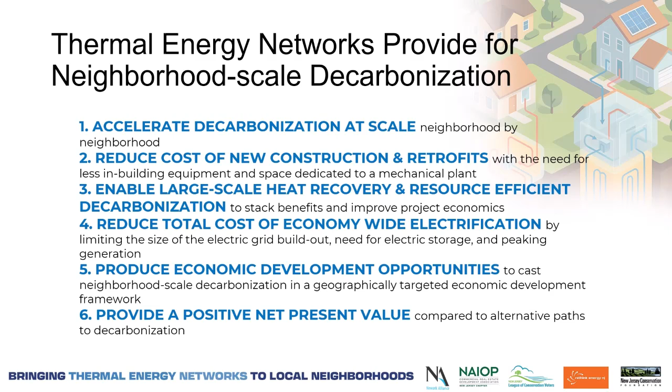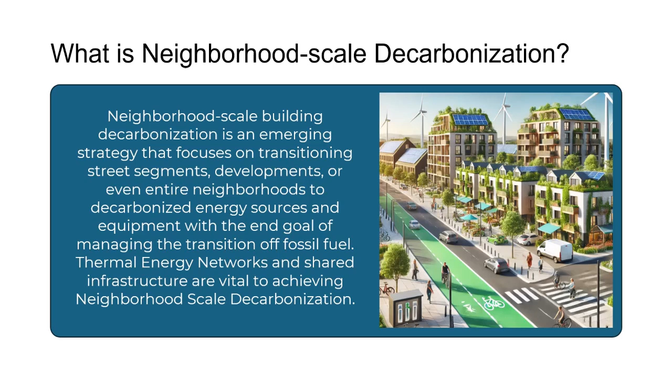This webinar will focus on neighborhood-scale decarbonization using case studies directly from professionals working on current projects. These projects are transitioning street segments, mixed-use developments, or entire neighborhoods off of a dependence on fossil fuels using thermal energy networks as a decarbonized energy source, along with highly efficient electric appliances. Thermal energy networks connect otherwise separate parts of a city in order to utilize waste heat or ambient temperatures, such as from a data center, a local body of water, wastewater systems, or from geothermal bores.

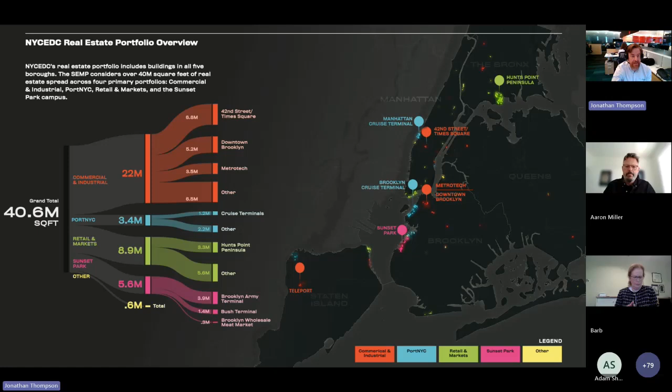There are several campus-like properties within our portfolio. You can see from this map we have several properties that are very much waterfront and also clusters of properties which lend well to thermal energy networks and shared loads. We have three projects that we're currently developing concepts for right now for thermal energy networks: one in Teleport in Staten Island, another in Hunts Point in the Bronx, and another in Sunset Park in Brooklyn.

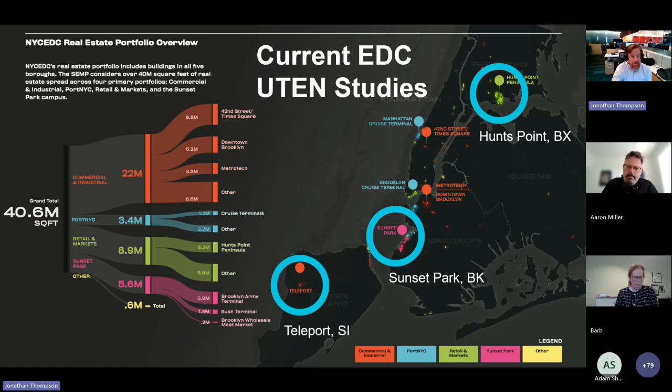I'm going to focus on Sunset Park today because we have moved on to what is phase 2 for our study of the thermal energy network in Sunset Park. We had actually completed phase 1 in 2023, and that included the Brooklyn Army Terminal, which is somewhat of our flagship property. It's a little under 4 million square feet of manufacturing and industrial space, which is also right next to the Brooklyn Wholesale Meat Market, a refrigerated warehouse offering year-round waste heat potential.

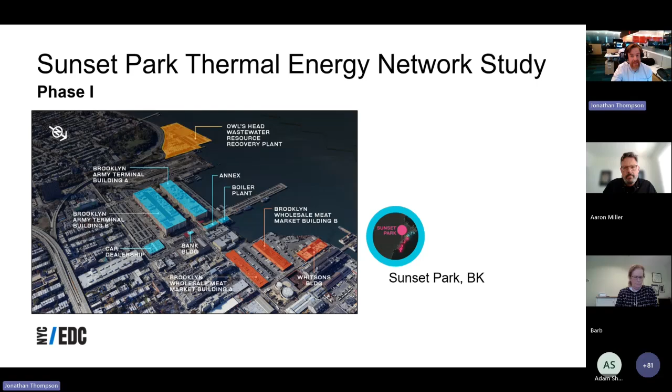The study also leaned on previous work done by the Department of Environmental Protection, where they evaluated all 14 of the city's wastewater plants and the potential waste heat from the effluent outfall of these plants and what that could mean in terms of capturing that waste heat resource. Because that information was already available and it was actually quite nearby, just across what is also city property, the 65th Street Rail Yard from Brooklyn Army Terminal, we used that as an asset in developing our initial study.

The goal was to leapfrog technologies in terms of heating and cooling, whereas Brooklyn Army Terminal and the wholesale meat market were currently operating on unitary systems, DX cooling, as well as gas-fired hot water heating throughout. These systems were not centrally controlled. There was also often simultaneous heating and cooling. It was largely inefficient and also did not fit in line with the city's overall strategy towards decarbonization and electrification.

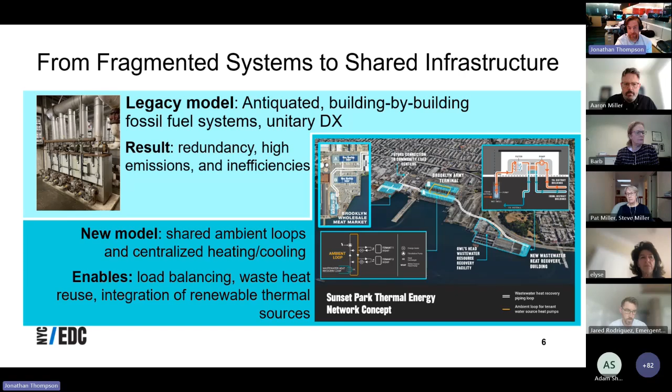This concept that we developed in phase one included an ambient loop between buildings A and B of Brooklyn Army Terminal, connection through from a primary loop at the effluent outfall of the Owl's Head wastewater treatment plant to Brooklyn Army Terminal, as well as the wholesale meat market, allowing us to share waste heat to balance those loads and integrate that waste thermal resource, moving towards a modern system that was efficient, decarbonized, and had as low an impact on our utilities and electrical load as possible.

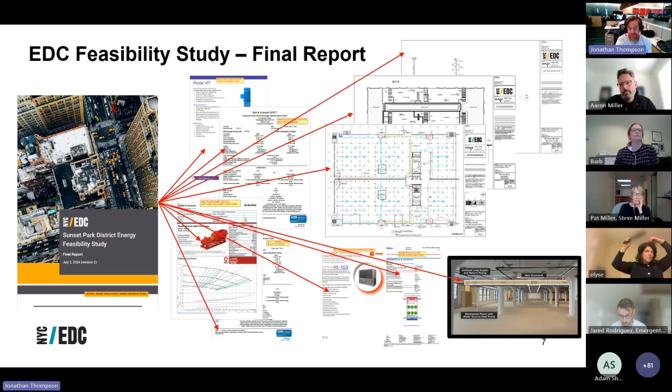The study was technically very rigorous, very heavy in terms of specs, components, the actual details of the system. But what it didn't provide in good enough detail to move this forward effectively was really a strategy of how we actually deliver this project, how anyone makes effective decisions from a strategic standpoint.

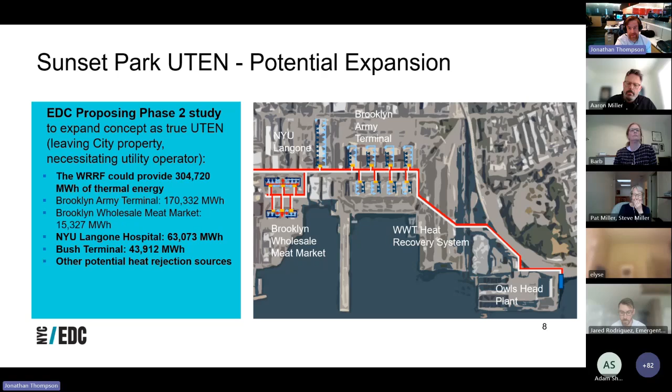Another thing we found is that with the total annual loads of the Brooklyn Army Terminal and the wholesale meat market, we were only using a little over half of the total annual capacity of waste heat from that Owls Head plant. So for the large capital expenditure of that utility infrastructure, we were not utilizing that waste heat well. There was an obvious need to expand this project from the phase one scope towards something that broadened both the physical boundaries of it, but also the informational boundaries of what it is that we were solving for.

So we moved towards a phase two study that we had actually kicked off just a few weeks ago, and this expanded the boundary of both the potential off-takers and different adopters of the system, leveraging our property up at Bush Terminal, as well as private off-takers, including NYU Langone, that was just across the street from the wholesale meat market, but also including other thermal sources such as river water exchange and geo-exchange at the rail yards.

This broadening of the physical scale allows us to introduce different thermal sources, to evaluate different loads and better optimize this system and provide potentially overall benefit in terms of the financial value of this.

But what we needed to solve for in order to really make this commercially deliverable was, what is the value of the system to the city? What are the financing pathways? How do we pay for this system? What's the governance structure, considering all of these different entities that would be involved, including DEP, EDC, the mayor's office, the PSC, utilities, private off-takers, and then what is the roadmap, the implementation roadmap?

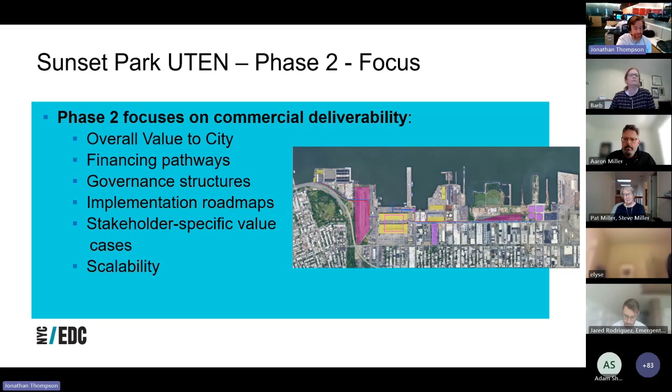The technologies that would be included, and then the final group would be the adopters. Not that they are the last group, they are just as important as any other group within this project. Without the off-takers, there is no thermal energy network. So bringing the value of this to them, having their buy-in from the beginning, is immensely important.

But before we actually go to them within this project, it's really having an understanding of the needs and the kind of decision pathways of the other levels that we need to have understood before we go to them and say, this is a real project and this is how it's going to get done, and this is the value to you.

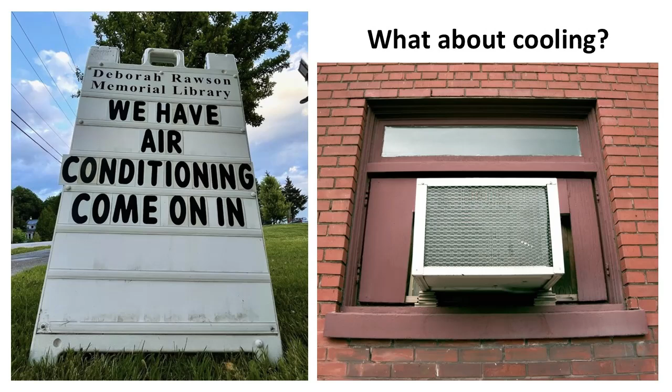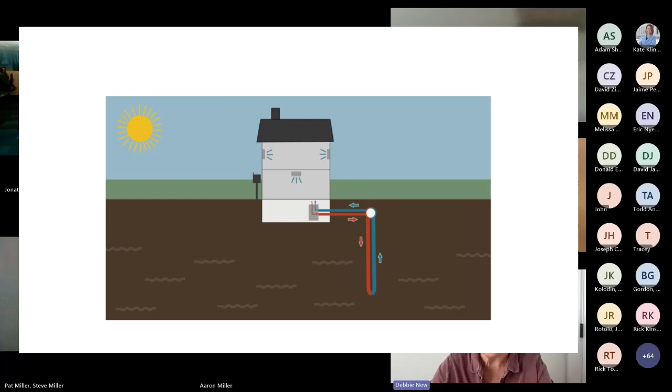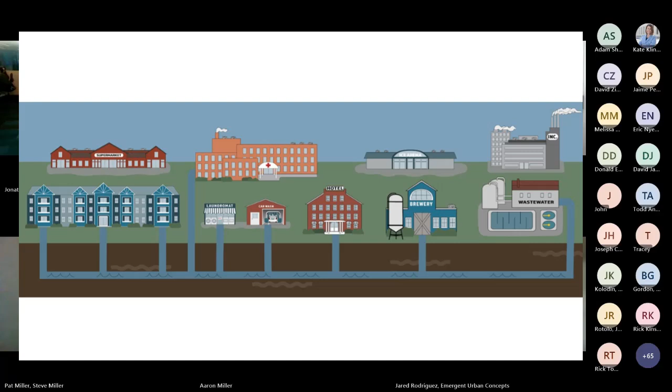We also really try to help people understand the opportunity with wastewater, and Aaron is going to talk more about that in a little bit. But we can access heat from wastewater at the building, at sewer lines, and at the gold mine that's a wastewater treatment plant. We also talk about waste heat from buildings, especially from large refrigeration systems, from any kind of cooling that has to happen inside, and reject heat outside from supermarkets, ice arenas, and large buildings. So we show what it can look like in a town where under the town green, there can be a geothermal bore field that you don't even see once it's been drilled and seeded and covered over. We show a grocery store that's contributing its waste heat to the network, and a lot of different kinds of buildings where their wastewater can contribute heat into the network. So we help people understand that TENS use heat that already exists across a community, in many cases has already been paid for and would otherwise be discarded.

We also talk about how it can be shared efficiently, and this is really key to the benefits of TENs.

We explain that air source heat pumps have to work a lot harder at very cold temperatures and hot temperatures, and use more electricity. We make sure people understand that air source heat pumps are important to our electrification goals and they're complementary to other technologies. They have a really important role in what we're trying to accomplish.

But with ground source heat pumps, they use moderate temperatures. In many places, it's about 50 degrees underground that we can access and use. And if we're using waste heat, those temperatures can be even closer to what we want to stay comfortable inside.

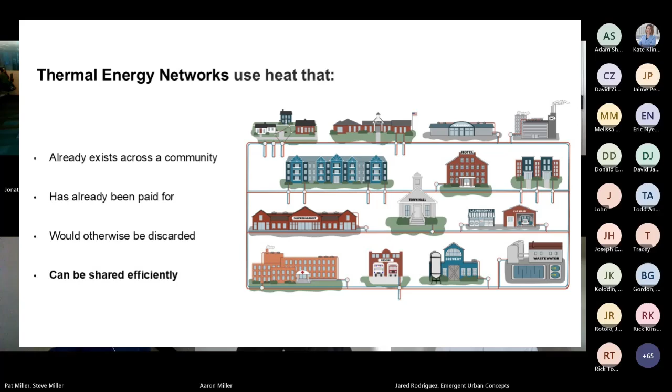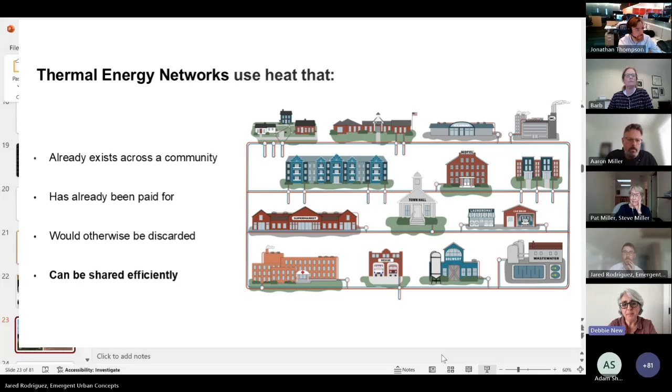So that high efficiency translates into energy savings, from which flow a lot of cost savings, and that all translates into many community benefits. Some of the top ones that are particularly important to many of the communities we're working with are economic development, downtown revitalization, and affordable housing. When we can hang on to energy dollars and invest them locally, we can do a lot more in our communities and for our communities.

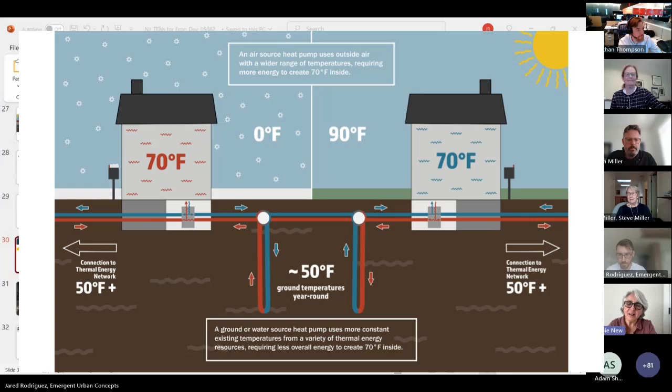Thank you. So we explained it's not just about communities benefiting from TENs, it's also about them having agency. Thermal energy networks as shared infrastructure, much like water and wastewater systems, mean that thermal energy is actionable locally in a way that the electric grid just isn't. And that's empowering for people. They can do something and they can direct it to get the most out of it for their community.

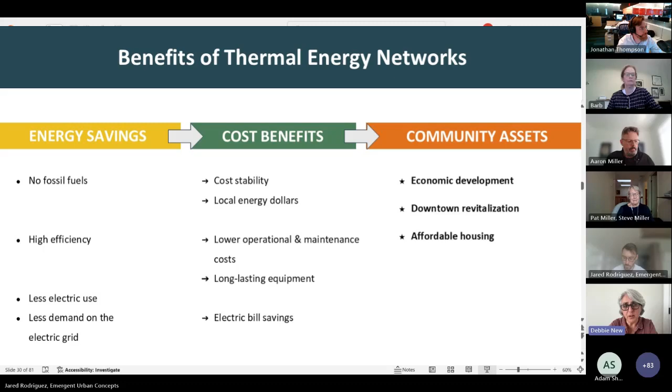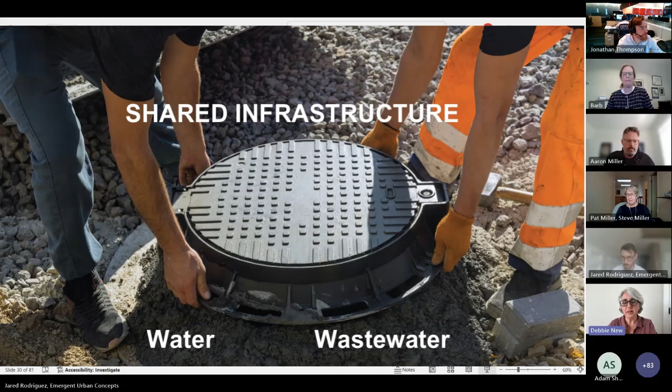So we've created a toolkit to help people understand how they can develop TENs where they make sense locally. It's divided into about 4 sections. The first is called Start Here, which is about local conditions that could be good opportunities for a TEN. Identify Opportunities is a lot about site selection, but also whether or not you're ready to launch a TEN, and how to lay the groundwork for one. Understanding Ownership looks at 3 basic business models: municipal, cooperative, and third party, and related financing opportunities. And Develop Your Project is something we like to call what to expect when you're expecting a thermal energy network.

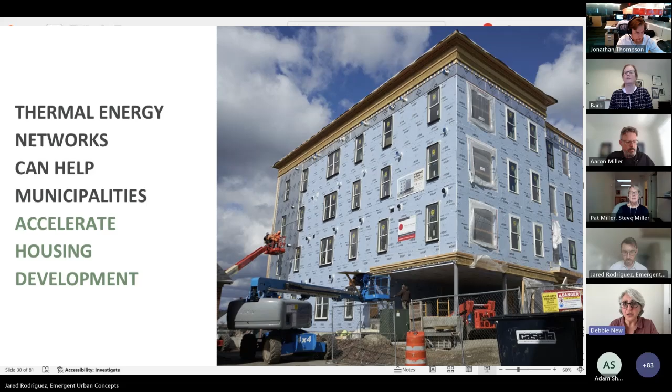Specifically, the entire trench can be eligible for tax incentives when thermal pipes can be incorporated into trenches already planned for water and sewer. Lower overall costs can incentivize developers when HVAC equipment can be financed as part of the network. Developers also don't have to be responsible for maintenance and operations when TENs are locally owned and managed.

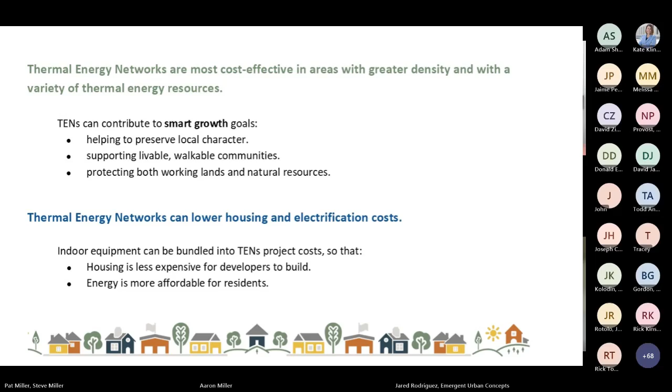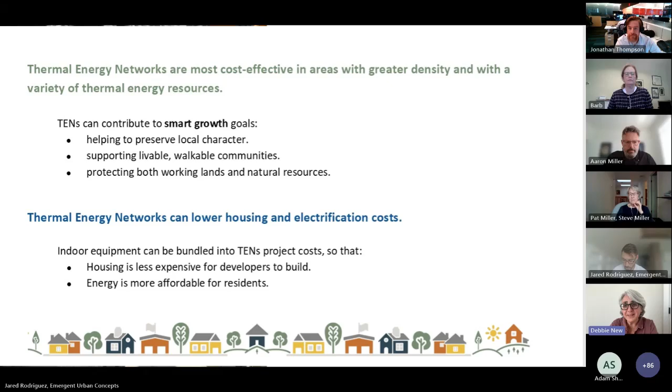As we know, water and sewer systems are public infrastructure that have many benefits. Municipalities install these systems and provide these services already. They have access to lower cost capital, which covers upfront costs, and customers paying regular bills cover that debt service and fund operation and maintenance. We understand how to do that.

So thermal energy networks are similar shared infrastructure. In fact, the economics are possibly better, as the water does not need to be treated as intensively as for potable water and wastewater.

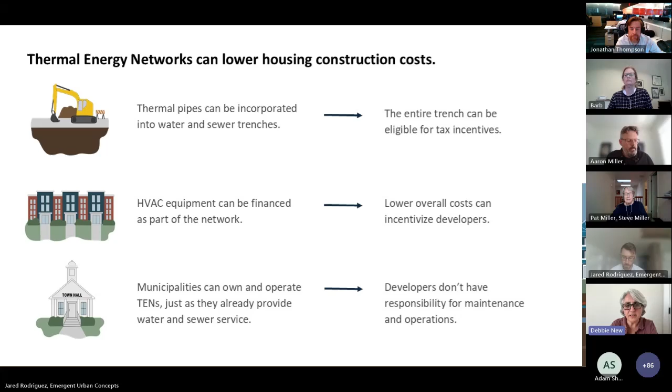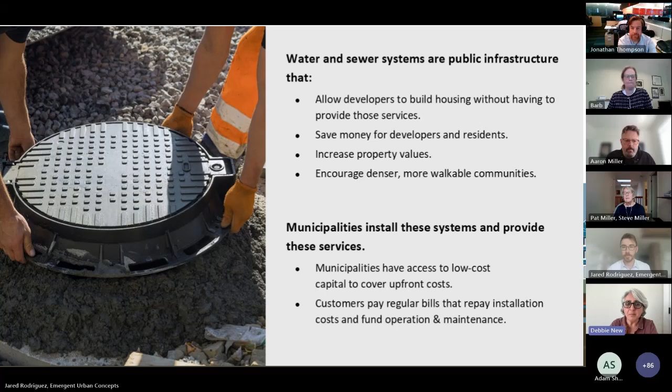We can do more with thermal energy networks when we coordinate and plan. Working TENs into planning means we're more likely to have the time and local buy-in needed to include them in projects, and we can start small and start now. We can have some TENs in place, making it easier to phase in more buildings and add thermal energy networks as we build and retrofit our housing stock over time.

So not only is heat a precious resource, but we also have the heat we need and opportunities to harness it, particularly for housing and related development. I understand that in New Jersey, you're really good at transit-oriented development, in fact among the best states in the country, which is an important opportunity to use TENs as a tool to do more of what's already familiar and in large part you already know how to do.

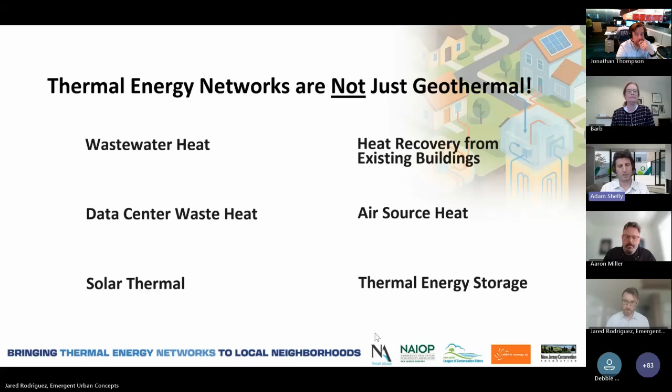I'll mention 30 Rock here and SNL - a lot of shows are recorded in 30 Rock. And all of that heat is now going to be pumped into adjacent buildings for domestic hot water and heating hot water. So it's a really powerful project that has the ability to save not only GHG, but a lot of money for the different customers, and also be a money producer for that thermal resource for 30 Rock. That's a huge distinction because the cash flow is not a one-way street. Everybody can get involved as a buyer or as a seller, depending on the criteria for that particular system.

So what do we do on the project? We're taking on everything from stakeholder management, phasing through the construction of the crowded streets. We're crossing 6th Avenue - there's a lot of complication to it. We're hoping that gets approved and built by the state. The design is going in shortly, but it's a really great opportunity.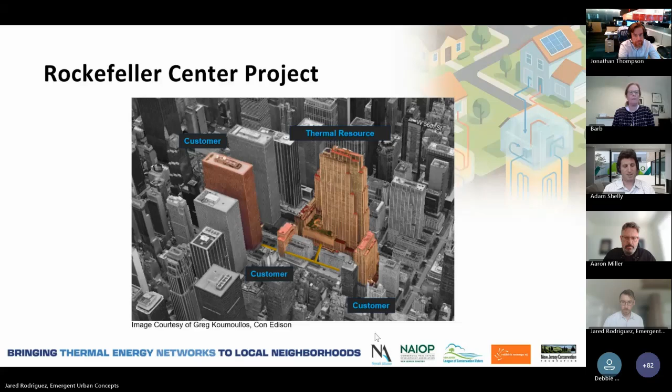A couple of key takeaways on this. Working with the regulated utility obviously adds complexity, but it also adds structure. The structure is helpful - it helps create governance models, cost allocation rules, to define different requirements and characteristics that you'll have during design and construction, but also during operation and expansion, because there's a lot of different factors. The stage gate process is really helpful in establishing this, moving from feasibility to concept to design to implementation.

It's essential. So it's tempting to rush to a preferred technology, but you have to resist that urge. You really have to look around and say, where are my assets and what sort of heat are they giving off and taking? I'm originally from Philadelphia, so I always like to tell people you got to trust the process - it's very relevant today with the NBA draft. So you have to trust that process. It goes a little bit slower, but it's important not to cut those steps early on during design and development.

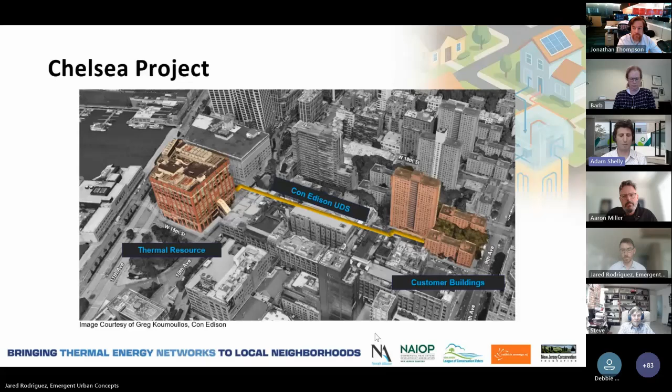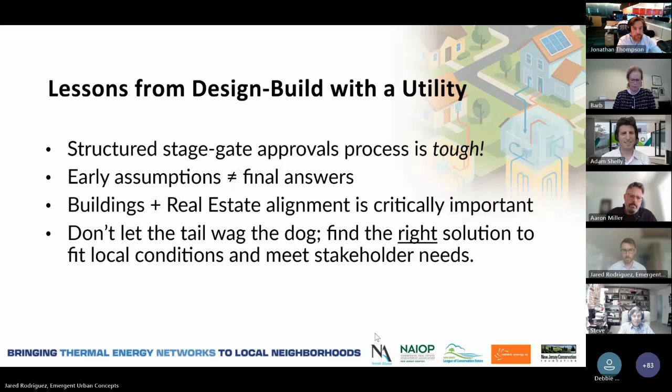Next slide. I'll skip that one. Let's go to the next one. Let's do one more, I think I lost track. Oh, we're burning through this.

This is great. How does this apply to New Jersey, everyone on this call? We see a really strong opportunity in that MUSH market - municipalities, universities, schools, hospitals - because they tend to own multiple buildings with various loads, and they tend to have capital planning cycles that align with energy investments. So we think that's a really strong market for New Jersey. They're also mission driven in a way that supports long-term decarbonization goals. So a well-structured thermal network across a town campus, some of those smaller towns, or something with a school or a hospital, I think are really good, easy targets to focus on.

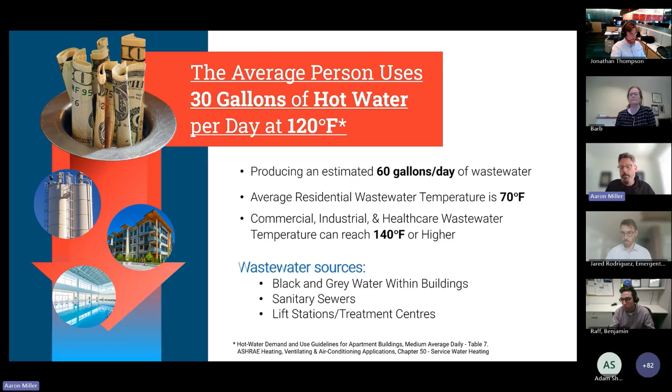Again, heating, cooling, and hot water production, just like you would with a standard heat pump. So we have two boxes essentially, with variations on a theme within each. The key is really scalability. This Piranha is a small heat pump.

Our smallest unit is in a 37 unit apartment building in Boulder, Colorado. We're providing 100% of the domestic hot water, simply capturing the wastewater before it leaves the building. The rule of thumb is if you give us 100% of the wastewater before it leaves an apartment building, we can provide you with 91% of that domestic hot water load. It's almost a completely circular economy.

It's very similar to solar thermal in that regard. As you can see here, in the middle, in white, all these market sectors make a lot of hot water waste and need a lot of heating, cooling, and hot water to match. So it's about finding the right mix of diverse assets. If you have a neighborhood with a lift station, a commercial laundry, or a microbrewery, you can use that as an energy source, a hub for a thermal microgrid.

As we've been talking about, you'll hear us talking about repeatability and scalability. We understand that thermal energy networks are fantastic, but they take time to develop. So it's aim small, miss small. Pick off what you can, and then continue to add to that mix.

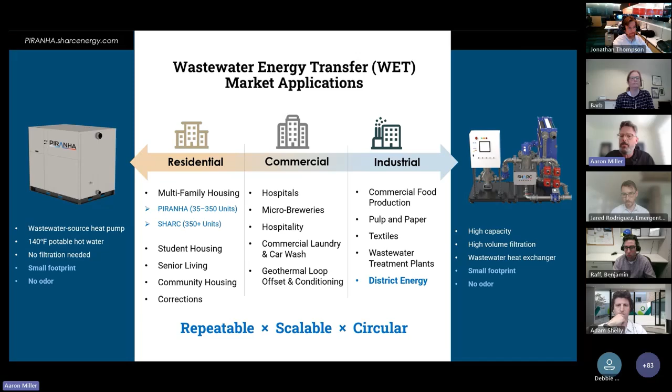I want to walk you through some success stories. These three are focused in New York, in various stages of development.

Amalgamated housing is low to moderate income housing up in the Bronx, and we're in the process of designing a system to capture all the wastewater before it leaves the building, to provide roughly about 85% of the domestic hot water for those buildings. It's a campus, so this is phase one. Phase two, phase three will add more buildings onto it, and will also incorporate geothermal. So again, it will scale up in a way that makes sense from a financial and civil standpoint.

Whitney Young Manor is a complete overhaul of LMI housing. This is a fascinating project because it takes a village - there is no one silver bullet. We're going to be part of air source heat pumps and other new facade and new hydronics throughout the entire building. What's really neat is they're actually excavating the ground because the sanitary pipe that takes all the sanitary from these two buildings out to city sewer runs four feet below the foundation. So they're going to excavate out the foundation to create a wet well to act as that thermal battery.

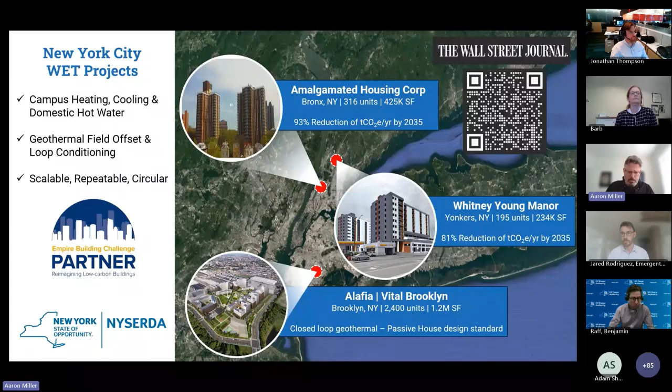Really fascinating project. The Alafia project, which is up and running right now and we're accepting tours, is again a multi-phase project. The first phases are these two buildings, Alafia C1, C2, which is two towers with a common sanitary output, and then a smaller building across the walkway, which has two Piranhas in it. We are using a mix of geothermal and wastewater energy transfer to maximize the thermal capacity and efficiency of the heat pumps in these buildings.

One of the great things about... I'm really sorry about these slides advancing.

It was interesting when we looked at the original model for C1, C2, these two big towers. The designer, Salis O'Brien, was saying, hey, we'll put the SHARC in to do heat recovery to make hot water and heating for the building. It turns out actually by putting the SHARC in to pick up the peak cooling loads, because it's passive house design, very cooling dominant, we were able to let the geo designer right-size the geo field from 125 boreholes down to 93. That's a massive first cost savings, over $500,000 on first cost savings.

Now moving forward, we'll use the sanitary to temper the loop, the ground loop, to keep it in that ideal 68 to 82 degree temperature range throughout the year to maximize the efficiency and capacity of the heat pumps connected to the loop. So you'll get the OpEx savings over the next 15, 20, 25 years. It's a win-win all around.

The other thing I wanted to point out as I move through these slides is, as flexible as our technology is with regard to connecting it to the mechanical and plumbing systems of said buildings, there's also flexibility in how you finance these projects.

This is a privately owned, heavily incentivized project. Private owner, private developer, and they're going to be owner and operated, but they're leaning heavily on Con Ed clean heat incentives. I know our technology qualifies for the clean heat and heat pump incentives in New Jersey, as well as the Inflation Reduction Act investment tax credit.

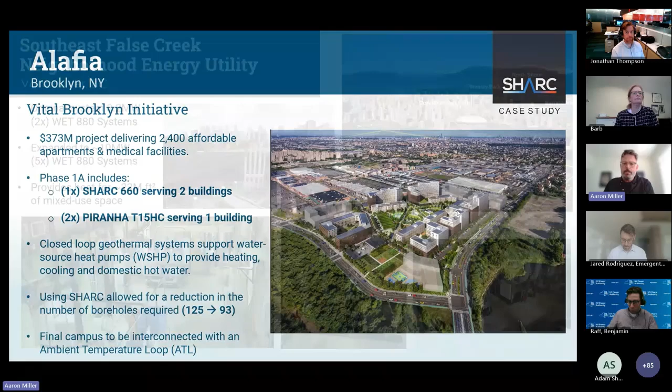So again, this is a rendering of the whole campus. They're eventually just going to build out these pods one at a time and then interconnect the entire campus with an ambient loop. Another really successful district project out in Vancouver.

I want to move through these pretty quickly because we're short on time. This is a standalone utility. It only takes money from the off-takers connected to the loop, so they don't take any incentives, no outside monies.

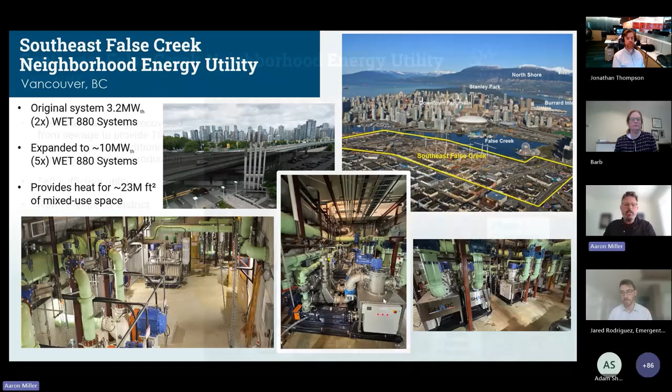Again, it started out originally as two SHARC 880s. We've now expanded it to five, and phase 3 is going to include this additional phase here in the city. So we're going to go from 3.2 megawatts to 10, to roughly 30 megawatts. Right now we're providing 180 degree hot water for 23 million square feet of mixed use space. They're going to 10x that in the next 5-6 years.

So again, scalable, and all we're using is the wastewater that's passing by in the municipal sewer line. It's an untapped resource that we're leveraging.

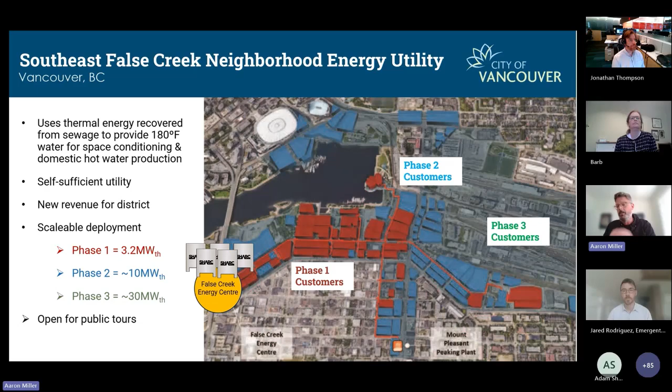Okay, well then let me get to - I wanted to show this slide because I want to show that thermal energy networks can be financially viable. This is lelem, out in a privately owned system out in Vancouver, brand new, all new construction.

This one system right here, our baby SHARC, the SHARC 660, is providing all of the energy needed to support an ambient loop to do heating, cooling, and hot water for this entire campus. As you can see, there's a lot of extra space in the building, and these wastewater holding tanks, the batteries that feed the system, are 3 times larger than they need to be for phase 1. But because we have the ability to plan out for the future, it economically made sense to build in the infrastructure so that we can over time add more on.

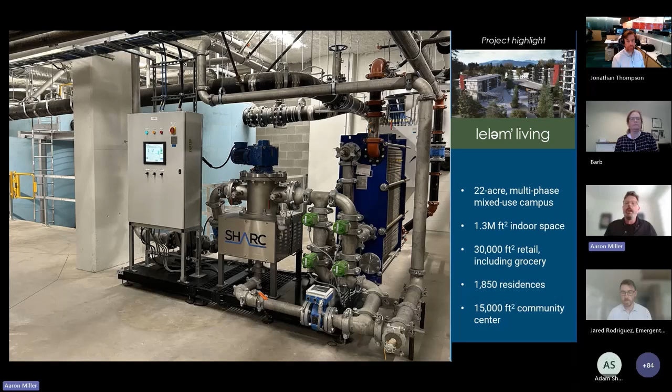And what's wild is this project, the whole thing, soup to nuts, the energy plant costs $8 million total. So as you can see here, faster than I can read it to you, it costs the operator about $8,000 a month to operate the system.

So what ends up happening is everybody connected on the loop pays a $20 flat fee, whether you're a supermarket or an individual homeowner. $20 is all you pay. You still pay your individual electric bill, but the $20 supports the ambient loop. It costs them about $4 to support that loop on a monthly basis. So they're taking that additional $16, banking it in a revolving green fund to help build out the future phases.

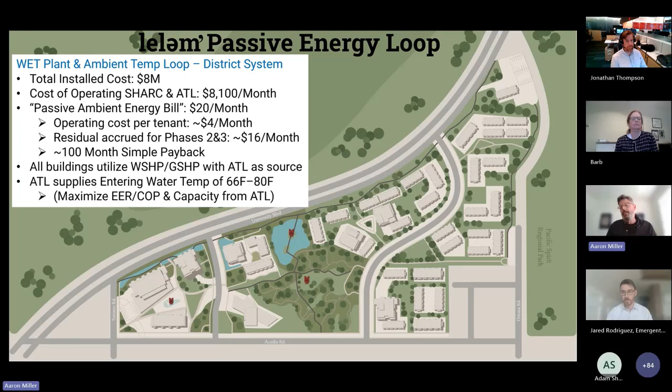So again, here's an opportunity where it makes sense financially and you can scale it and repeat it over and over again. I'm really happy to do a deep dive with anybody who wants to learn about how we do the wastewater energy transfer, but I'm really just thrilled to bring this technology to New Jersey and show you that we can do this at a building level, a neighborhood level, and even at a citywide level. So really happy and excited to be here. Thank you for your time.

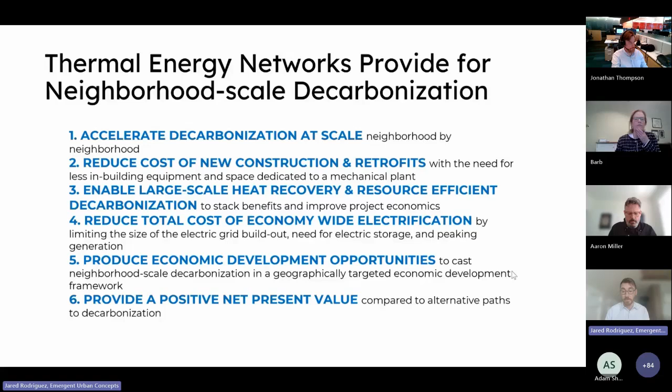And we could provide for a positive net present value compared to alternatives.

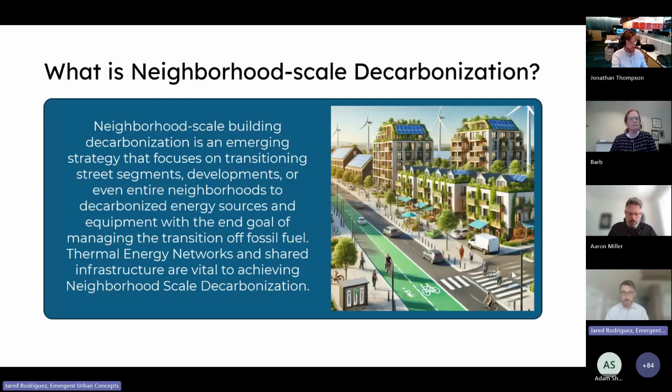So what is neighborhood scale decarb? Just to step back, it's a strategy that focuses on an entire geographically focused area to optimize the interaction between the various infrastructure typologies, planned development, existing buildings, and economic development goals.

Shared infrastructure to achieve that neighborhood scale decarbonization. So to advance neighborhood scale, we have to follow this RED approach, or resource efficient decarbonization. RED is a model that helps alleviate a lot of the difficulties that building owners face when they're attempting building-wide decarbonization. There are 4 steps within this process.

Reducing energy loads as much as possible. Just because we're electrifying doesn't mean that efficiency isn't important. So strategically reduce loads, strategically reconfigure systems that allow for interoperability between thermal energy networks and buildings, typically through low temperature distribution. We can't have steam in buildings, or else we can't connect to a thermal energy network.

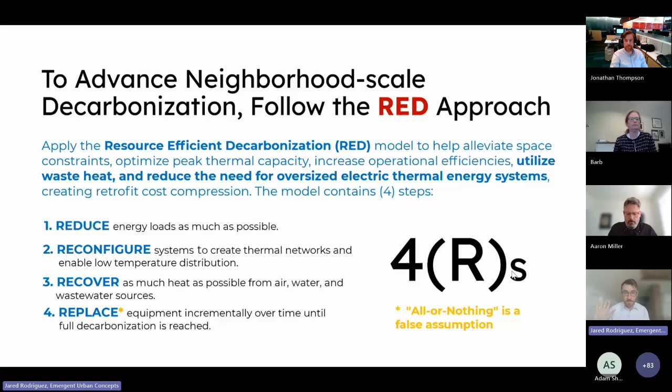Recover as much heat as possible from the building itself, whether that's from air or wastewater, or from neighboring buildings or other waste heat resources, and then incrementally replace over time. All or nothing is just a false assumption that we need to put to bed.

So here it is in another format: reduce, recover, partial load.

Can you just go on mute, please?

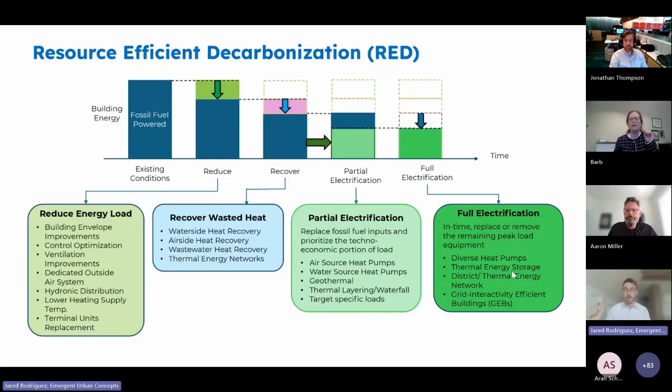Partial load electrification and then full electrification.

And then what does reconfigure mean at the neighborhood scale? It means adapting infrastructure systems to optimally move heat from thermal energy resources to buildings, among even legacy district systems, for example. And so this image, courtesy of Building Decarbonization Coalition, is effectively beginning to carve out what a marketplace looks like for thermal energy across a neighborhood.

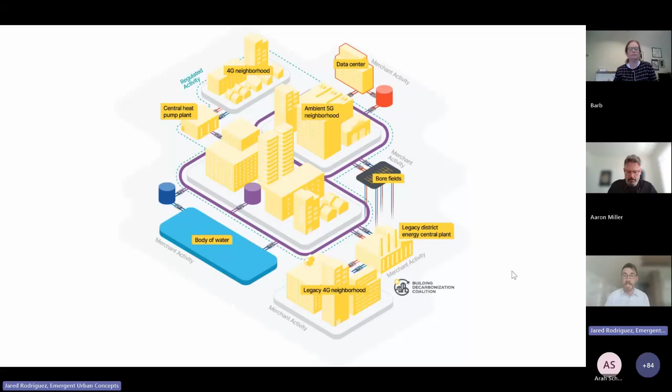Coming from multiple sources of heat or cooling, from storage at varying temperatures, between regulated investor-owned utilities or municipalities and merchants that might be supplying heat into the network and getting paid to do that. We could talk a little bit more about that.

So some policy mechanisms that we might want to implement in order to advance this work: permanent peak load reductions across the gas and the electric system, mandatory heat recovery. There's a lot of talk about data centers and AI, where heat is purposefully wasted. Should we be allowing that in a future where we're trying to decarbonize?

The idea that we're doing non-wires alternatives and managing electric demand across a grid in order to optimally expand that grid. Maybe we don't have to expand the grid so much, or as much as we thought.

Just skipping forward a little bit, strategic decarbonization investment zones that overlay economic development frameworks in neighborhoods so that we're achieving multiple outcomes. I think municipalities have a big role here, that they can be thermal energy network owners and developers, that they could work with the private sector in order to advance this work.

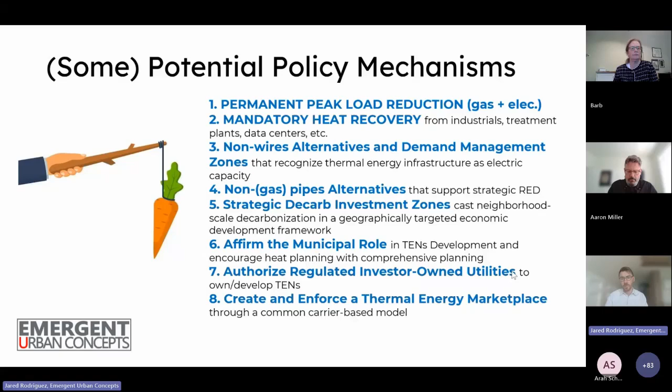Authorizing regulated investor-owned utilities—yes, the incumbent utilities can also do this, as Adam shared. And then also that we can create and enforce a thermal energy marketplace, similar to that image that I just showed you.

So UTENJA, what is it? It's the Utility Thermal Energy Networks Act of 2022 in New York. What can we learn from that? We can learn that the regulatory framework can support a diversity of players.

Private, regulated, municipal—we can create an open market. Regulated investor-owned utilities are not the only players. There's a whole role for a bunch of other folks out there that can serve this marketplace, including municipalities.

Campus and customer-owned systems, they're already there and they should be lightly regulated or exempted because they manage their own systems. And then perhaps investor-owned utilities should only be allowed to distribute thermal energy in pipes and not make or extract that thermal energy, sort of like how the electric system works, where the utility just moves the electrons, they don't produce the electrons. The more competition, the better, just in general.

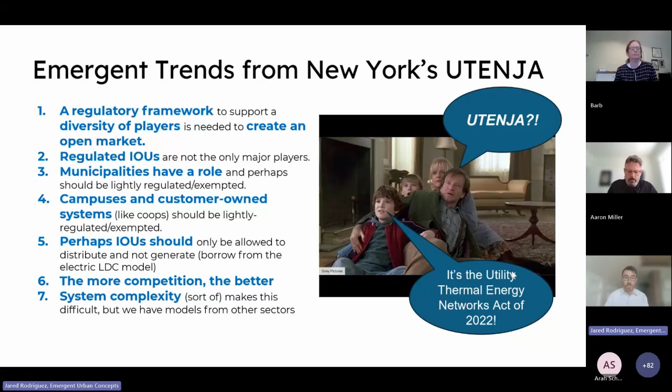We need to be moving to least cost solutions. And system complexity does make this difficult, but we could look at other infrastructure systems, just like wastewater or the electric system, to get to the right space.

So what's common carrier? What does that mean? Open access in a marketplace, across a system. It's a regulatory framework that could mimic open access electric systems or gas systems, where multiple providers, suppliers, or prosumers—I don't know if you've ever heard that term, where someone could be a consumer and a supplier or a producer—use that network to supply end-use customers.

So what are some key takeaways here? We need many parties participating. We can't block folks out. We need to develop best practice standards, very important. Regulated utilities have a role, but they're not the only player. Municipalities might have the most important role.

We need a democratic process that supports fairness and affordability, and that kind of hits back at the municipal question: what's more democratic, the municipality or the Public Service Commission? Ask yourself that. So economic development and neighborhood scale decarbonization.

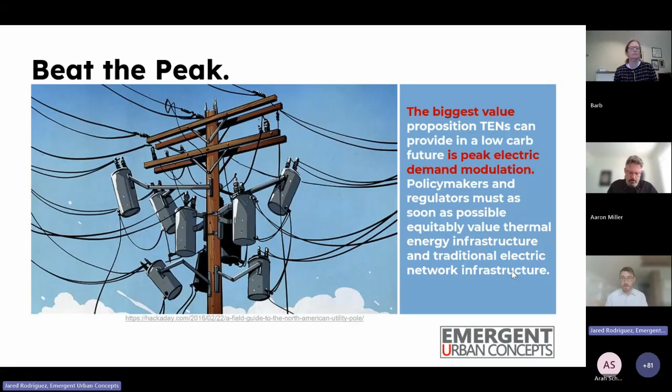How do we optimize this and maximize this across the economy? So what can you do? You could tell your policymakers now and the regulator that we don't have to radically expand the grid to meet electrification loads, that we can accelerate decarb and improve grid reliability, that we can choose the least cost solution. We might have to do a little bit more work identifying what that is, but we can choose it. We don't have to spend tons of money on this and hobble our economy just in furtherance of decarbonization.

We can have it both ways. We can mandate the least cost solution. We can value thermal energy resources like we value electric resources - that includes battery storage, power generation. Thermal energy storage could be valued in a similar way, and we can unlock a market for thermal energy.

And so here we go. We're going to talk about some discussion here. And I think Barb might have some prompt questions for us in the panel.

All right, am I back? Did everything work? Okay, we're here. We made it.

So I don't know how everyone sort of reacted to the presentations. Obviously there's a theme here that we need everybody if we're going to make this happen. Building decarbonization, especially across cities, is especially difficult, and so we need conveners, and sort of these middle managers to pull a lot of different parties together to make this kind of thing happen. So Debbie, I don't know if you could speak to some of the work that you're doing.